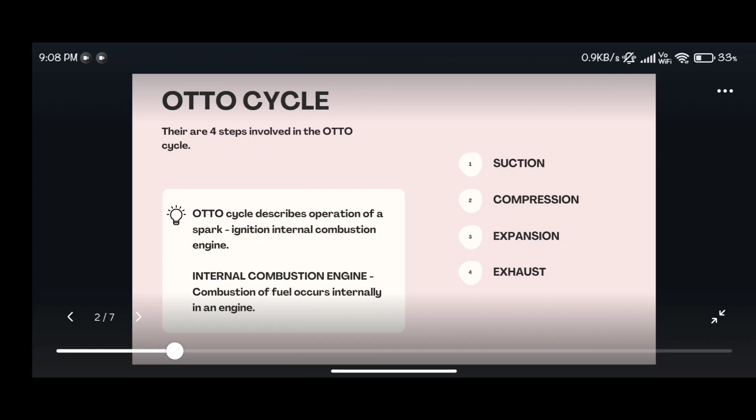First process, intake process, also called the suction process. In this process, air comes from outside into the cylinder. At this moment, the piston is at the bottom, that is BDC, bottom dead center. Of both valves, intake and exhaust, the intake valve is open and the exhaust valve is closed. This creates a vacuum in the cylinder. The vacuum causes an increase in volume and also an increase in temperature. Due to the increment in volume and temperature, pressure will also increase.

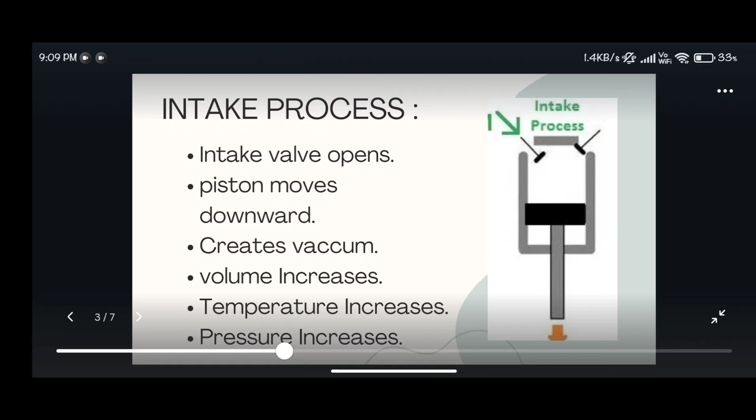Second, compression process. In this process, the piston moves from BDC to TDC, that is, upwards. The air and fuel mixture is compressed in the cylinder due to this movement, with a small possibility of increment in temperature. The air-fuel mixture compressing causes an increase in pressure and temperature. Due to this increment in pressure and temperature, the volume decreases. This process is also known as the isentropic compression process, in which an adiabatic process occurs reversibly and causes compression. This is the compression process.

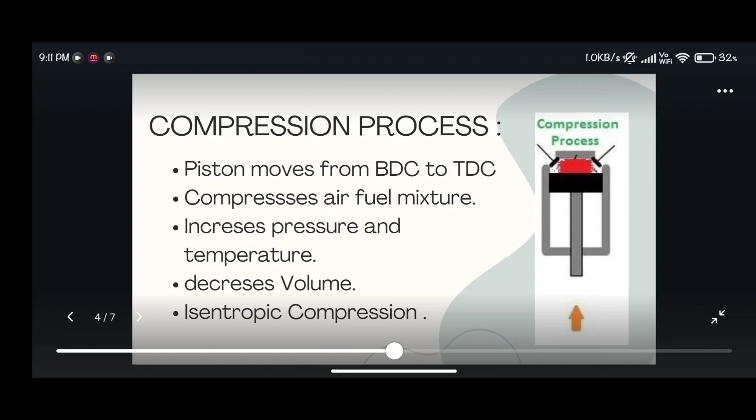Hello everyone. Today I will be explaining two processes, expansion and exhaust, of the Otto cycle. Basically, the Otto cycle is a thermodynamic cycle that describes the operation of a spark ignition internal combustion engine.

In the expansion process, the spark plug is ignited and both the inlet and exhaust valves are already closed. The piston moves from TDC to BDC, that is, from top dead center to bottom dead center. While moving, there is a decrease in temperature and pressure, and an increase in volume. This is also known as the adiabatic process.

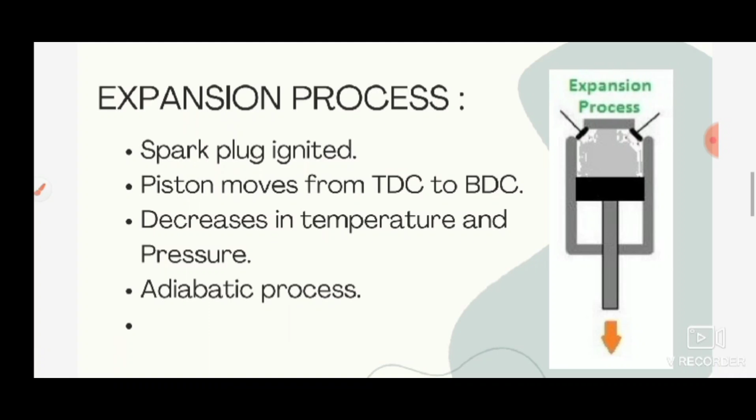Now coming to the exhaust process, the last step of the cycle. Here the inlet valve is already closed and the exhaust valve opens. The piston moves from BDC to TDC, bottom dead center to top dead center. While moving, the pressure decreases and the temperature also decreases. This helps push the combustion products outside.

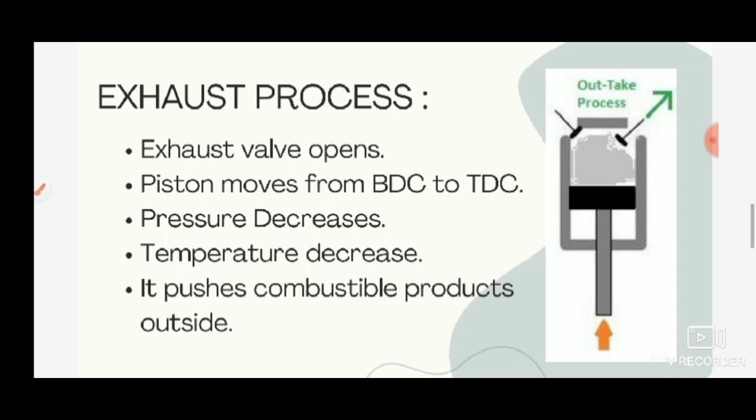As we have seen the expansion and exhaust processes, the above diagram shows the position of the piston with respect to its processes, and this graph shows the PV diagram of the Otto cycle and its processes.

Now for this we have to find the efficiency. For process 2 to 3 there is Q inside, and for process 4 to 1 there is Q outside, that is heat released.

For Q inside, the formula is MCV times T3 minus T2, and for Q out we have the formula MCV times T4 minus T1. For finding efficiency we have the formula Q1 minus Q2 divided by Q1. By rearranging this formula we get the final efficiency equal to 1 minus Q2 by Q1.

Now substituting equation 2 into equation 4, by solving this equation we get the relation between all four temperatures, that is T4 by T1 equals T3 by T2. Now doing minus 1 on both sides, we get the relation T4 minus T1 by T1 equals T3 minus T2 by T2.

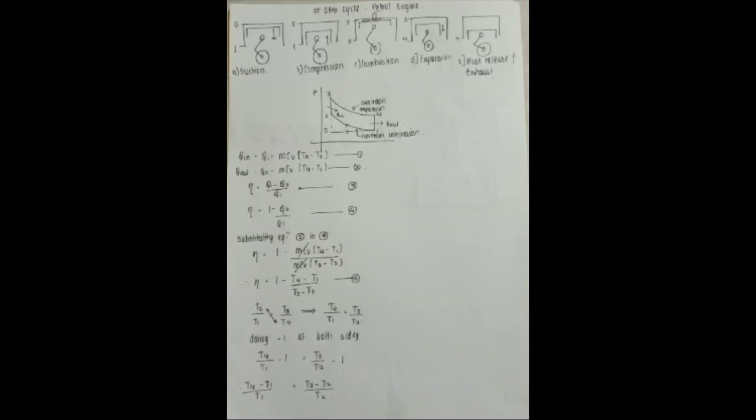Now for this we again have to find the value of T1 by T2. By rearranging those values we get T1 by T2 equals T4 minus T1 by T3 minus T2. For the adiabatic process we have the relation T1 by T2 equals V2 by V1 raised to gamma minus 1. Substituting this value of T1 by T2 into the previous equation, we get efficiency as 1 minus T1 by T2.

Now substituting equation 7 into equation 8, that is the value of efficiency, we get the final value of efficiency.

Therefore the efficiency is equal to 1 minus 1 by Rk raised to gamma minus 1. Here Rk is V1 by V2, that is the volume at the beginning of compression upon the volume at the end of compression. So coming towards the conclusion, we have seen the two processes, expansion and exhaust, and the derivation of the efficiency value.

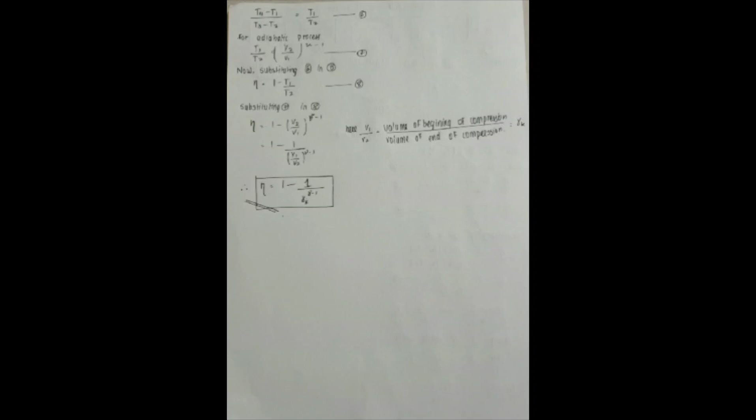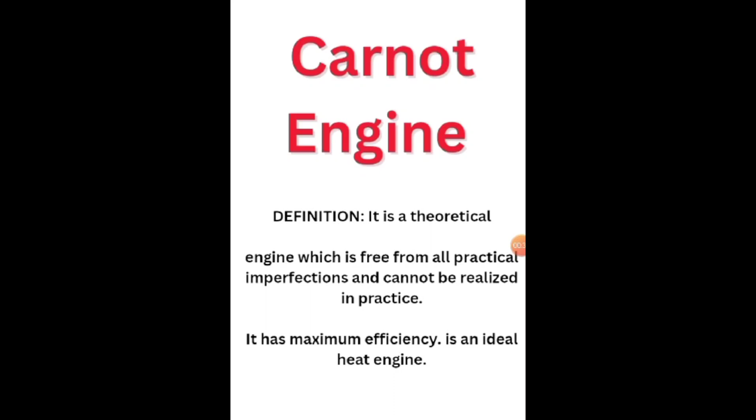So firstly we will learn exactly what the Carnot engine is. Carnot engine is the theoretical engine which is free from all practical imperfections and cannot be realized in practice. It has the maximum efficiency and it is an ideal heat engine. Carnot engine works on the Carnot cycle. So the Carnot cycle is the thermodynamic cycle that represents the most efficient process possible for a heat engine, as it has the maximum efficiency and all the heat supplied is converted into work done. This means we know the equation Q is equal to W, so all heat is converted into work done.

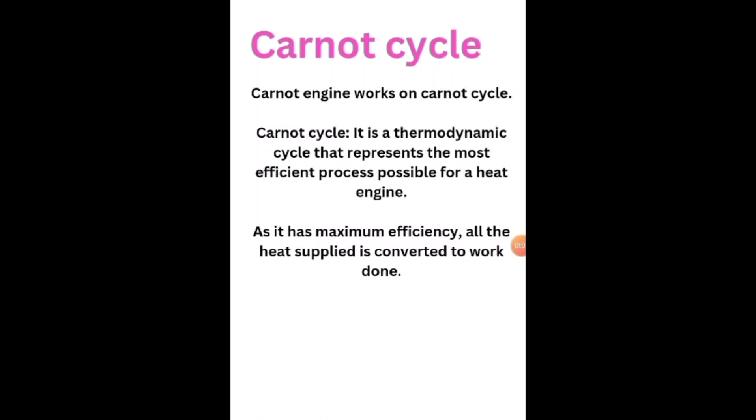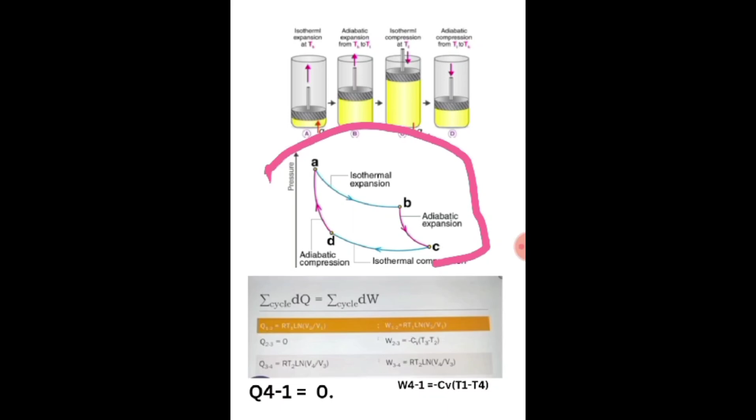So let's go to the derivation for the efficiency of the Carnot cycle. In this PV diagram, two curves will be adiabatic, and the remaining will be isothermal expansion and isothermal compression. In this adiabatic process, we can write two equations. The first is for B to C, which is adiabatic process.

So the first equation for B to C: T1 V2 raised to (gamma - 1) equals T2 V3 raised to (gamma - 1). This equation arranges as T1 by T2 equals V3 by V2, raised to gamma minus 1.

The second curve is adiabatic for D to A. So the equation is: T1 V1 raised to (gamma - 1) equals T2 V4 raised to (gamma - 1). This arranges as T1 by T2 equals V4 by V1, raised to gamma minus 1.

So from equations 1 and 2, we get V3 by V2 equals V4 by V1, and this arranges to V3 by V4 equals V2 by V1. This is equation number 3. We know that Q is equal to RT1 ln(V2/V1).

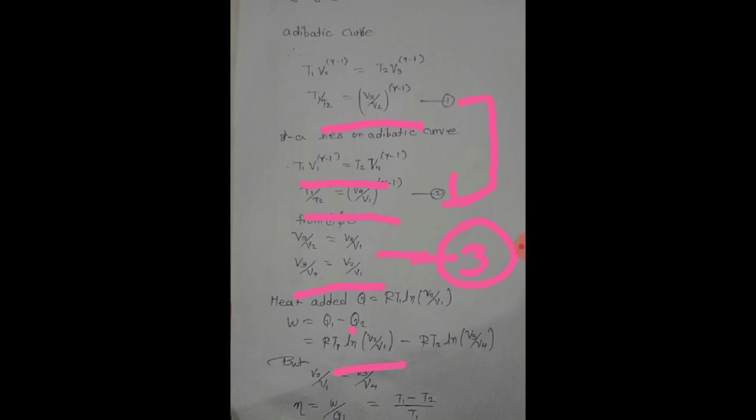So work done, W, is equal to RT1 ln(V2/V1) minus RT2 ln(V3/V4). This is the value for W. We know that efficiency is equal to W by Q. So we put W equal to this value, and Q equal to this value.

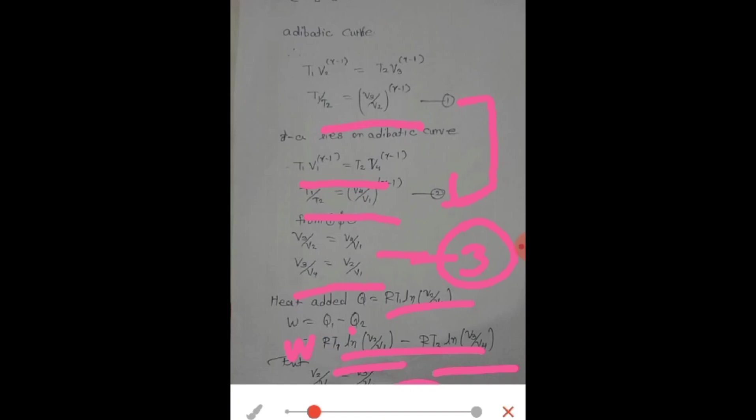So this equation is solved, and then we get the efficiency for the Carnot cycle. The efficiency for the Carnot cycle is T1 minus T2, divided by T1. Thank you.